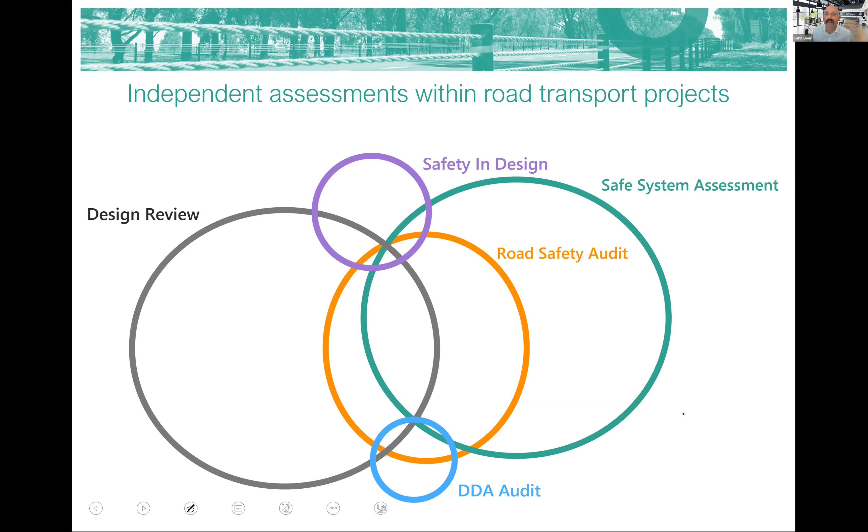Right, I'm seeing a hand up there, Max. Is that an accidental hand up, do you think, or somebody wants to ask a question? I'll just get in—oh, no, there we go. So we've got a question.

Is the DDA federal legislation or does it vary state to state? Yeah, that's a good question. I'm not a DDA expert. I understand it's state by state legislation, but I think there's some Australian standards for DDA stuff as well, so it'll be that, but I think each state has their own specific legislation. Somebody in the group is no doubt a far more experienced DDA person than I am and will be able to answer that.

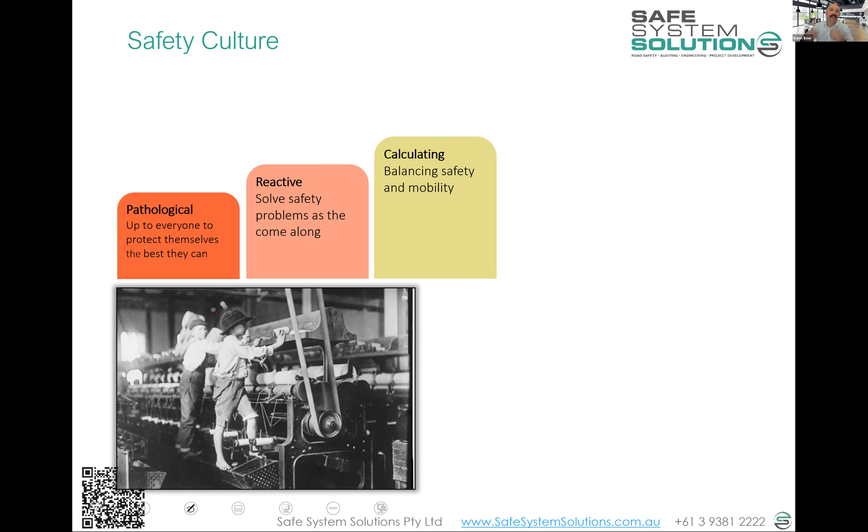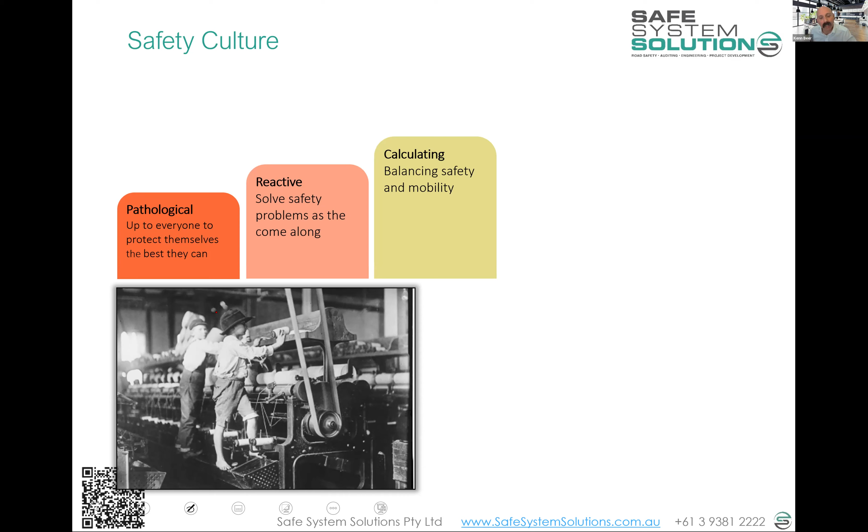And that's where you start to get into this calculating, and you find your balance - what can I afford with widget production and the like, what's a good investment, and find something just suitable in there.

What we aspire to, and what's Safe System aligned, is a proactive safety culture. It's where you have an incredibly high level of safety set, and you produce your widgets up to that level of safety, and you don't go beyond it. It's how we operate widget factories in developed countries these days - we have no hesitation in shutting down a factory if there's a risk, until that is rectified, because it's unacceptable.

And you need to invest heavily in continuing to maintain a safety culture at this level. It's not just like you get some things in order, get some processes documented, and then happy days, everything's good - no, it's a continual ongoing task.

But when you relate that back to the transport system - and I've given you a few little clues, I put mobility instead of widget production - where do we sit with our road networks in Australia and New Zealand? The reality is we are across a lot of these in a number of ways. We certainly have a pathological safety culture - we license young drivers, we pat them on the back and say it's very dangerous out there, safety is your responsibility, and good luck.

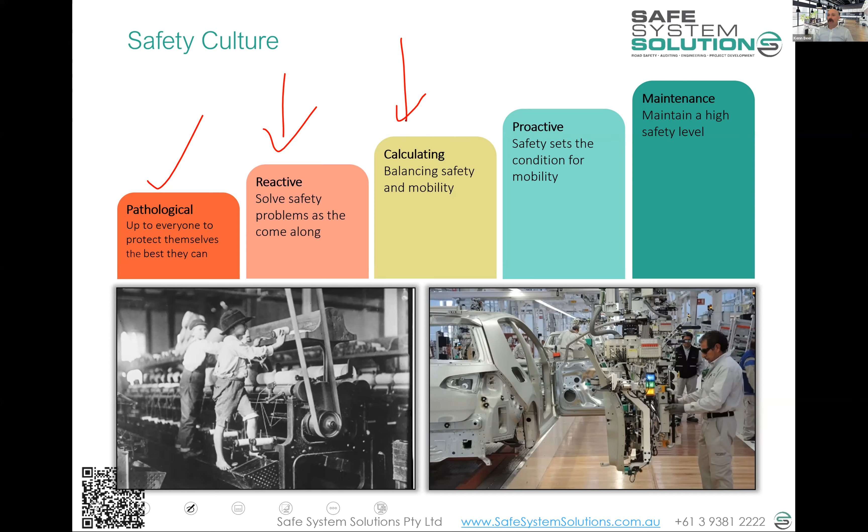But let's have a little quiz, Max. One of the questions you've been given the answer to already, and one you haven't, you'll just have a guess. Although I think some of you might have seen the question before. But Max, is that one going to come up? Yes, let me launch away.

So module 1, which of the following is not a key principle of the safe system? Aim for no death or serious injury, aim for no mistakes on the road, people are vulnerable, people make mistakes, shared responsibility. Hopefully everyone can see that up on their screen. Please just click on the answer on the screen, don't need to type it into the chat or anything like that.

And you can submit your answer. The second question is, at what speed did Usain Bolt cross the finish line in his world record 100-meter sprint? 24, 34, 44, 54, or 64 kilometers per hour. Have a guess, chuck your answers in, and once everyone's populated that, we can share the results and see what everyone's thinking.

People aren't being marked on this, and we don't even know who's guessing what. The quiz we talked about, that's at the end, and that's the one you'll be marked on. It has similar sorts of questions, except for the Usain Bolt one which we haven't covered in the content, but the first question is a good example of what kind of questions might pop up.

These answers are just anonymous, so don't be too concerned if you're not 100% sure. Just give it a go and we'll share the results shortly. We've got 86 people submitted, so we're nearly there. We'll give it 10 more seconds to let everyone populate their answers.

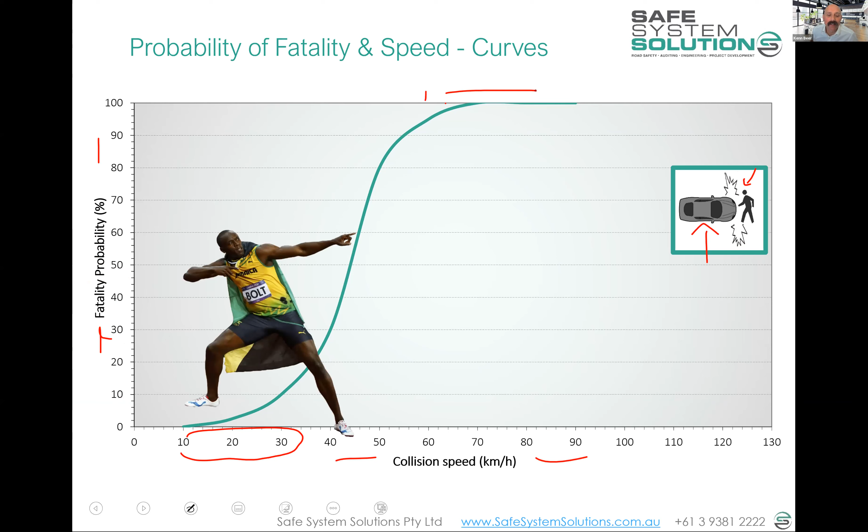What we sort of know is that we can handle these sorts of forces, and hopefully this will stream for you.

And he goes on to win the gold medal at the Olympics the next year, because he would recover. That's what we're designed for.

But we've created things that propel us way faster than that, and that come at us faster than that. We have this for more crashes than just cars hitting pedestrians. We've got it for vehicle to vehicle right angle crashes. So this is a right angle crash where this vehicle, which we call the bullet vehicle, is the one that does the damage, strikes the target vehicle at a right angle.

And we know that around 30, 40 or 50 kilometers per hour, it's likely that the occupant of the target vehicle, driver's side if a driver's side strike, or passenger side if a passenger side strike, will survive. Up at your 70, 80, 90, 100 kilometers an hour or there, we know it's highly likely that the driver or occupant of the target vehicle will be killed.

And for head-on crashes, we know it's a little bit higher, 50, 60, 70 kilometers per hour, pretty likely to survive. And that's the speed of each vehicle, right? 70 kilometers an hour for this vehicle, 70 kilometers an hour, closing speed of 140. Impact forces on the occupant of the vehicle, 70 kilometer per hour crash. Some of you are probably now questioning the physics of that.

Actually, there's a fun Mythbusters episode that crashes cars into each other and then into brick walls to prove exactly the point I'm making. So do you reckon we can pop that up onto Moodle and everybody can watch Mythbusters on work time, because that's always fun. But essentially the idea is that two vehicles, the same weight, same mass, when they collide, we're thinking about the occupant of the vehicle and the forces on them, and they will go from 70 kilometers an hour to 0. So it's the equivalent of going from 70 kilometers an hour to 0, hitting a brick wall. So yeah, watch the Mythbusters episode.

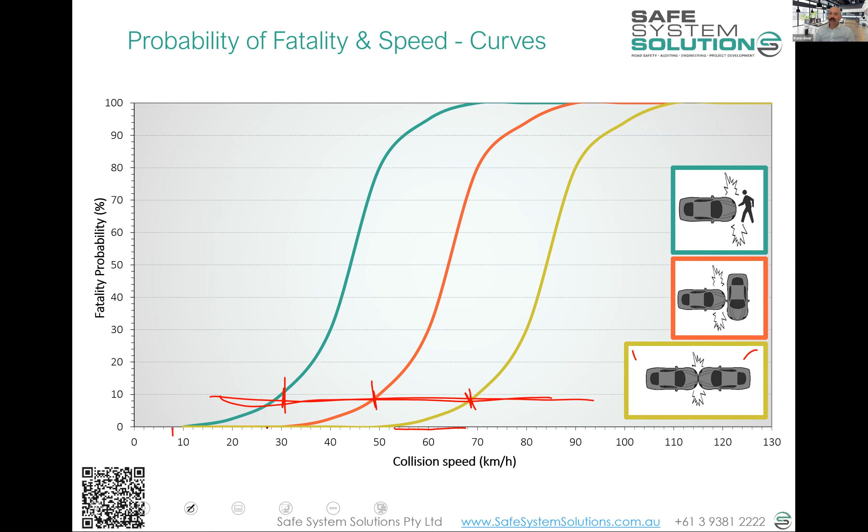You'll be coming back to these numbers because they give you a little window into safe system assessing. A key part of a safe system assessment is to quantify the severity of the crash using a broad brush approach of numbers.

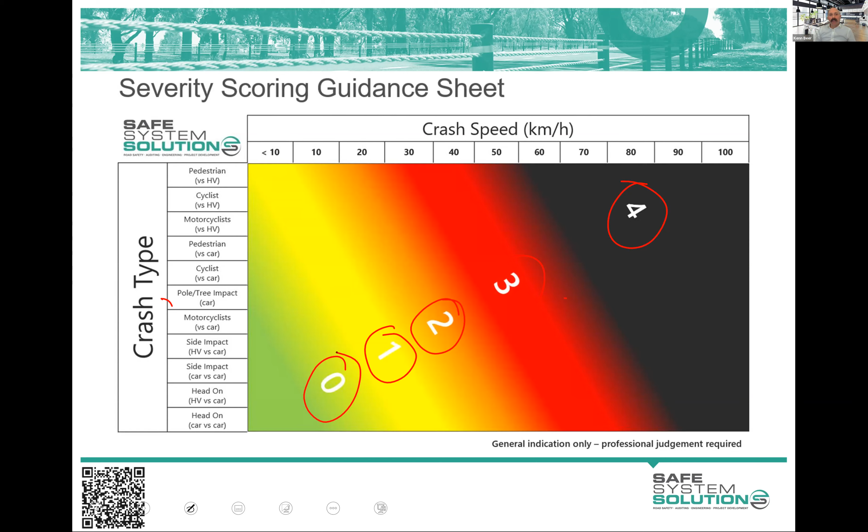So put a pin in that for now, or just remember there's some pretty important information on that slide. I'll present this next one and then pause to see if there are questions or comments I need to address.

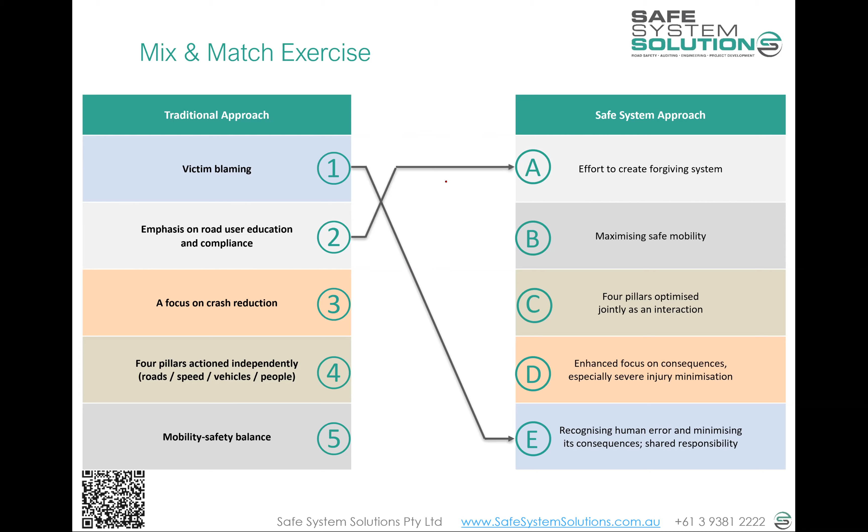Victim blaming. Well, we're talking now about recognizing human error and trying to minimize its consequence, and that's shared responsibility. Emphasis on road user education and compliance shifts to an effort to create a forgiving system now. We're certainly not ignoring road user education and compliance, but more of that effort is going into creating that forgiving system. A focus on crash reduction moves to an enhanced focus on consequence, especially severe injury minimization. So understanding we're not going to eliminate crashes, we're just going to make the consequence much less. We're going to try to stop crashes happening, absolutely, but being aware that some will still happen and we need to manage those. The 4 pillars actioned independently move to the 4 pillars optimized jointly as an interaction of the system's elements, and mobility-safety balance now becomes maximizing safe mobility. So it's like word changing, but kind of important.

I think Ian Cameron made a pretty nice statement in 2016 on a sort of world stage. He said: we need a paradigm shift in road safety policy to stop the road death epidemic, and we need it now. It is unrealistic to expect that education and enforcement alone will bring the needed step change. Even road users who know and follow the rules make mistakes. A safe system creates an environment in which simple mistakes will no longer kill or seriously injure people - that's really what we're aiming at. That's a nice little statement.

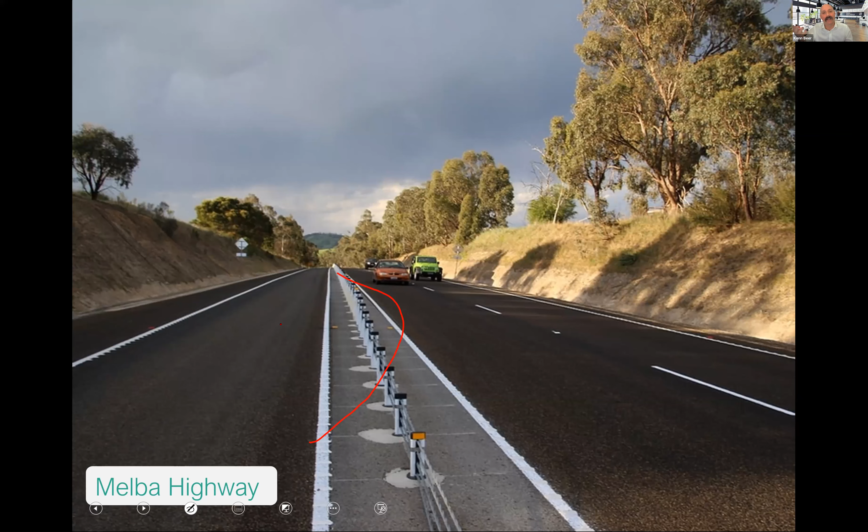Anyway, the point being, the reason I bring this up and generate a bit of debate is that we are trying to change a system here, right? It's not about doing what we've always done, which is a white line and maybe putting some rumble strips on it, some audio tactile edge line or center line audio tactile. Often people refer to it as rumble strips, technically not rumble strips - they go across the lane, but that's not the point. These things are good and the bright lines and that, but people are still going to make mistakes and they're going to leave their lane, and we need to try to stop them hitting other vehicles.

And it's different to the way that we've designed and operated these roads for a long time. But unfortunately, we need to change things, and you will face challenges all the time. The one thing is that a safe system assessment provides this nice tool for us to use to present the actual expected outcomes in alignment with safe system principles. We don't get caught up in these design standard little bits and pieces. And yes, there are other challenges with the project team, but it's adding more power to the road safety argument in some of these jobs.

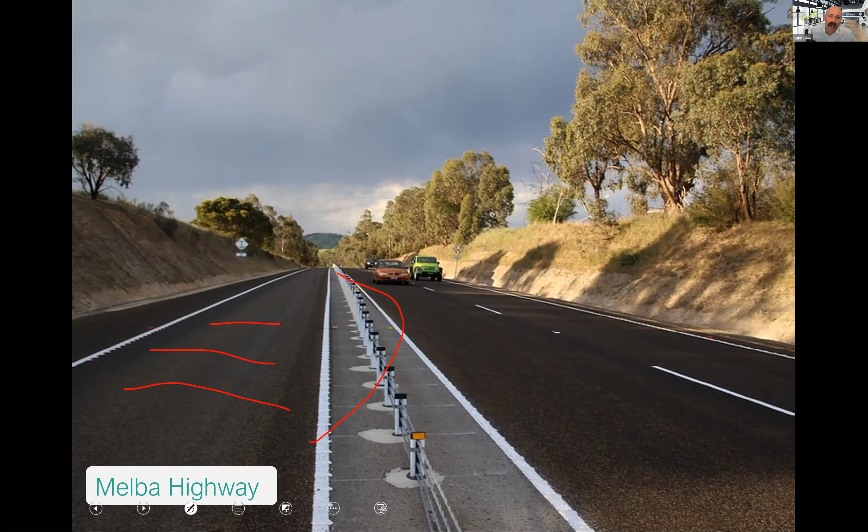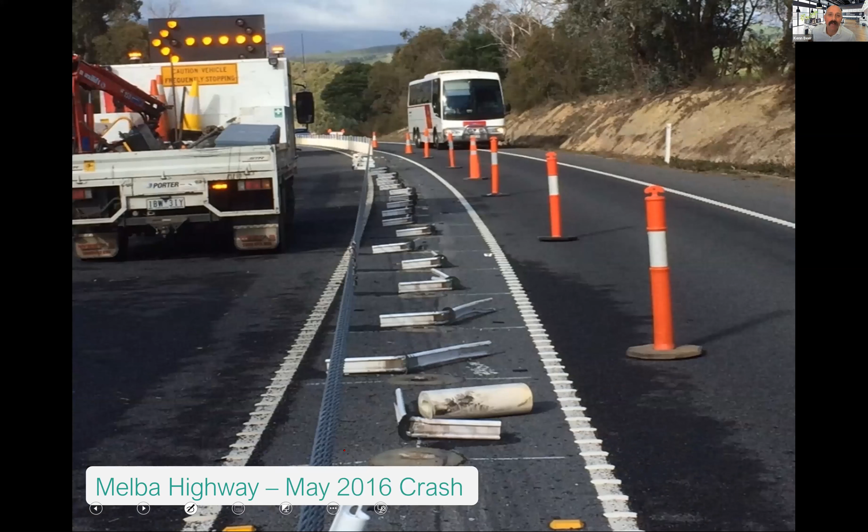So this one did go in, for a decent stretch, and it was one of the first ones. And there were different tweaks to the design and retrofits - this has got your old stack cushion there, motorcycle friendly cushioning around the posts. It doesn't do a huge amount, but at least you get your barrier system in the middle. And of course it got hit. I mean, that's what it's there for - we put it there, it's going to get hit.

And interestingly, this one got a phone call from one of the people involved, who was calling the region that put it in. You've probably been in that situation - you're in the regional office and you get a phone call from the public and you go, here we go, and get shouted at about something. All right, and they actually were just calling to say...

Hey, just want to thank you, whoever it was, for putting this barrier system in. I'm pretty sure you saved my life. Somebody just came directly at our vehicle and then hit the barrier and went along the barrier and didn't crash. And the engineer in the region was smart enough to quickly get onto the comms and engage with people, and then a little video was made.

And we've put that video onto your memory stick into Moodle. If you haven't got your pack yet, it's in Moodle there - two 3-minute videos. Some of you have seen it, but it's a really powerful video showing that these people aren't bad people that are involved in this. They're lovely people. Simply one of them made a mistake, fell asleep, and the system kicked in. All right, human-made mistake. Crash causation, human failure, absolutely.

Did the system let that result in death or serious injury? No. One part of the system kicked in and basically redirected the energy, slowed it down over time. If that barrier system wasn't there, well, the police and industry would be pointing their finger and saying, why did you drive? You were obviously fatigued, you drove, and the finger would be being pointed.

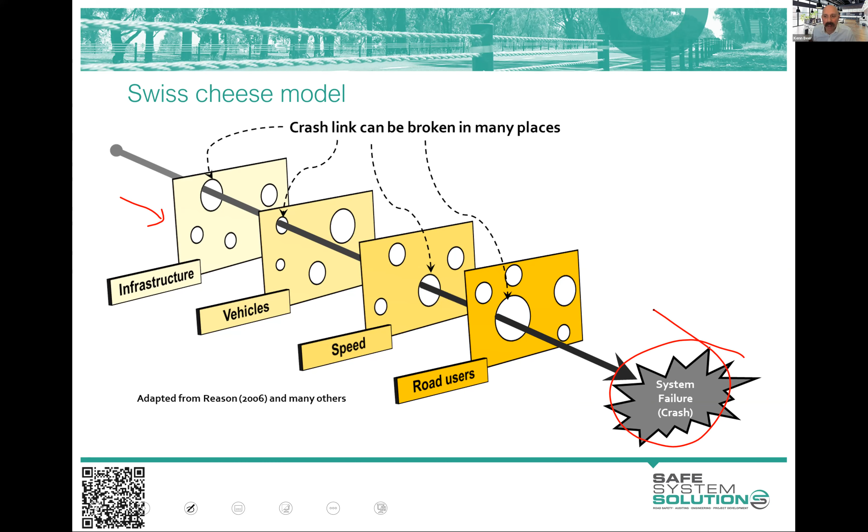Any questions for me, Max, or do I just keep ploughing ahead? I'm just typing away in the background, Ken. I think everything's coming along just fine, but certainly getting some good comments.

Thank you to James for just the mention that it's easy to get bogged down in the issues of if it's not meeting that deflection compliance, then you can't put this in the median. But as you said, Ken, if you don't have it there, then all you've got is a single solid line marking to protect you from oncoming vehicles. So you're basically willing to accept the risk of head-ons as opposed to somewhat of a risk of deflection occurring into that traffic lane. So yeah, it's good perspective.

Yeah, and safe system assessment's a wonderful tool to draw people out of the depths of that detail to look at what is going to happen with this. That being said, I don't want people to lose sight of the importance of detail and understanding it. It's just the ability to contextualize your detail and how it's important, and understand innovation, changes, design exceptions are all part of what we're going to be having to do more and more of going forward, in order to alter our system for areas that are hideously deficient in terms of safe system alignment, like running a road, separating vehicles going 100 kilometers per hour plus by a white line.

I want to talk about some other elements of the safe system before we get into a lot of discussion about roads, roadsides, and speeds. So I really want to talk about the road users, the vehicles, and then just a little more sort of speed physics fundamentals to start with.

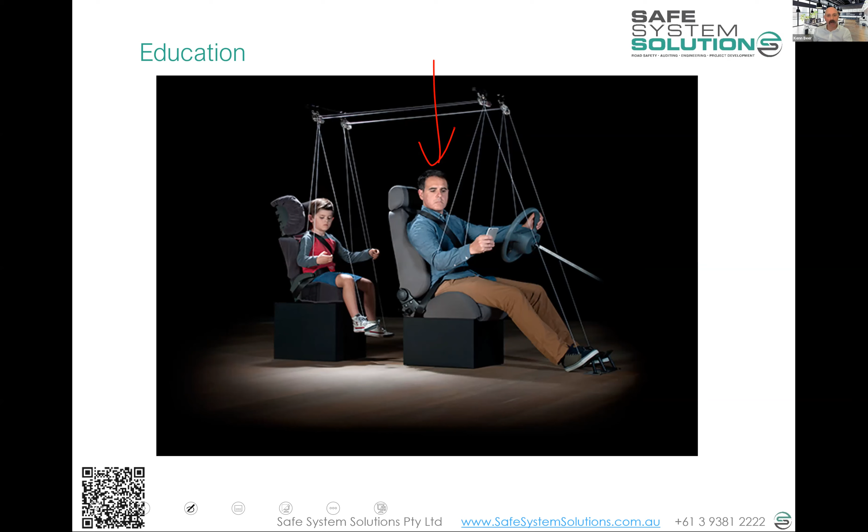I mean, there's interesting research out there to show that communities are far more willing to have speed limit reductions in place for the protection of wildlife than they are for the protection of humans. That's an interesting one. It's slightly off what I'm saying here, but you've got to understand what changes people's behavior. What are they willing to accept? But don't tell people that we're doing it for their safety, their kids' safety, the community safety, the wildlife safety, something else, fuel consumption, anything else rather than their safety.

What works? Whole of school approach I talked about. Education combined with other partner activities, the police, enforcement and education, and even some infrastructure as a combined effort is really quite powerful. Supporting community education is good.

We have an amazingly energized community of road safety volunteers out there. And what our role is to ensure that they are investing their time, their effort, their own money in things that we know are going to work. And it really, we do often see communities investing their own money in sending their, get a small community that decides they're going to send all their young drivers to advanced driver training course, and they'll pay for it, through all their own hard work. And their heart is so in the right spot, they're actually making their young drivers more likely to be killed or seriously injured. So we need to help them through this.

Taking them through the morgue, same thing. It is not effective when you say to the young driver, hey, if you don't drive safely, this is what will happen to you, or the trauma ward or something like that. We know that doesn't work. In fact, the data, the research and evidence on that is showing that it affects the drivers who are the least risky and were never going to take any risk. They are the most traumatized by that and altered. The risk-taking people, they're not affected by it. Interesting.

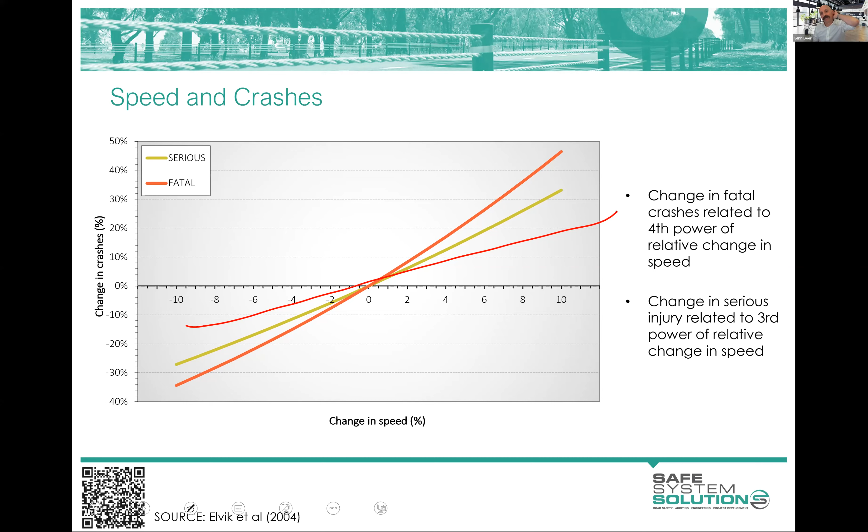But we need a lot of work to convince the public that speed, and especially speed limits, have an impact on road safety. There's some stuff in the notes you can look at, but a lot of the public just do not believe speed limits influence the number of crashes. They're a bit more convinced about speed limits and the severity of crashes, maybe some understanding of basic physics, but still a portion don't believe that. Maybe I'll give them credit that they were saying people might not follow those speed limits anyway, so maybe that was their justification.

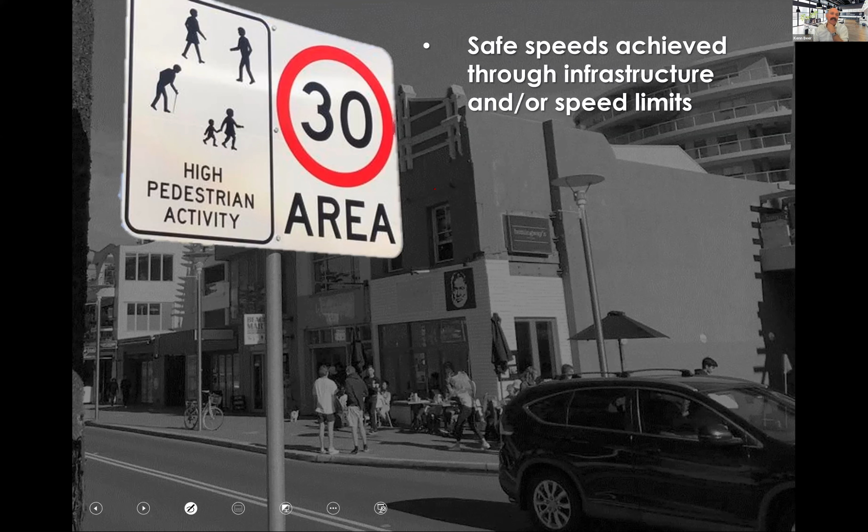But the thing is that we are operating a transport system where we need to move people and goods, and it's not about having everybody traveling at 10 kilometers an hour everywhere. No, we need to operate and change our system so it can have speed where we want speed, but done safely, and maybe lower speeds in other areas. We can do this through speed limits and/or infrastructure, and explaining why a speed limit is in place can be very beneficial for compliance.

And protection of vulnerable road users is quite effective in terms of helping people be okay with a red circle around a black number.

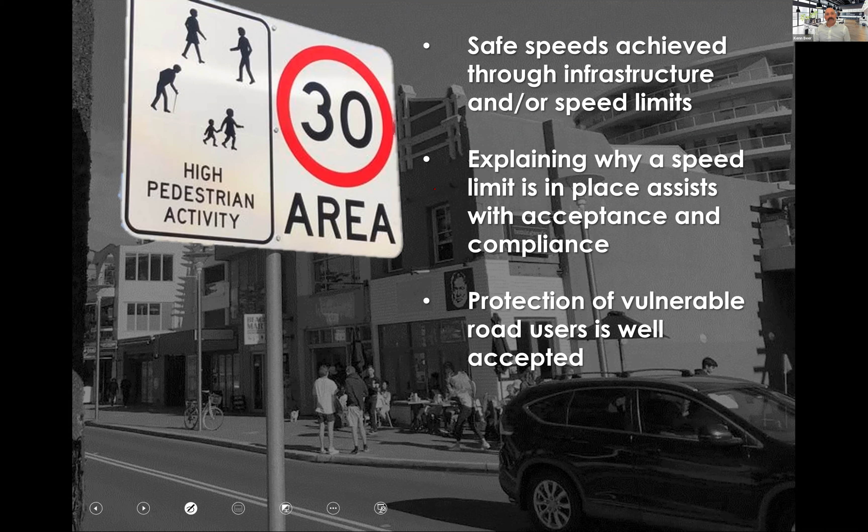Being a bit more creative, crafty or specific with when we reduce speeds can be good. Variable speed limits, I think, are going to continue to grow over time, and we'll see targeting of speed limit reductions at specific points in time.

Anyway, I'll briefly run through this. Max, you're probably not going to get much time here, but risk is likelihood times consequence. That's the general international definition of risk. It's financial risk, it's health risk. It's what is the chance that a bad thing is going to happen? And then how bad is it actually going to be? What's the magnitude of badness?

In a safe system assessment, we take likelihood into exposure. So how many people are exposed to this bad thing? Then what's the chance that the bad thing's going to happen? And then how bad is it going to be? So how many vehicles are passing through this intersection? What's the chance of a vehicle crash? And then what's the severity of the crash going to be?

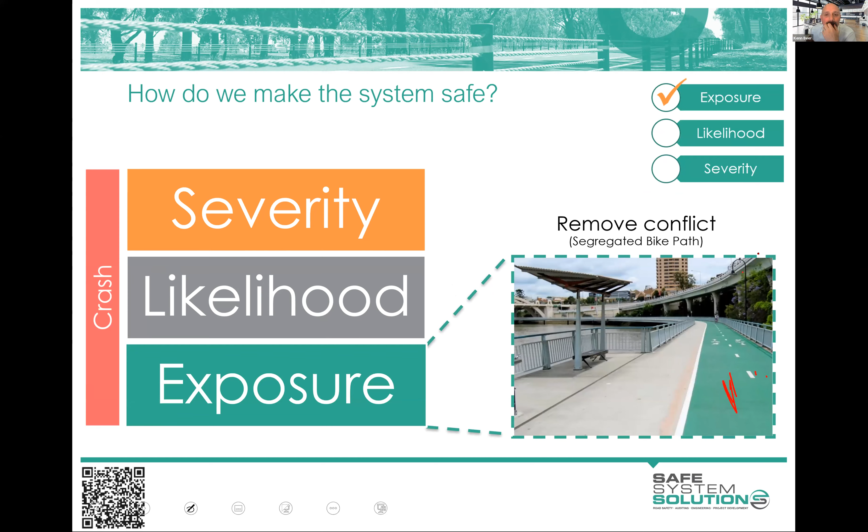The likelihood is what we've been doing for many, many years. The signs, the line marking, the RRPMs, the shoulder sealing, all of this stuff is reducing the likelihood of crash. The traffic signals, reducing the likelihood of crash.

The severity comes into play when we reduce the speed, change the angle, increase the protection. Lowering speeds through an intersection, through the conflict points, reduces the severity of crash. A barrier system reduces the severity of the crash. You run your energy along the system rather than hitting a tree or a culvert.

We're going to delve into exposure, likelihood, and severity in huge detail over the rest of the modules. But I'll clip it to Max quickly in 2 minutes to show you the quiz you've got to do in Moodle, hopefully. Thank you very much, Ken.